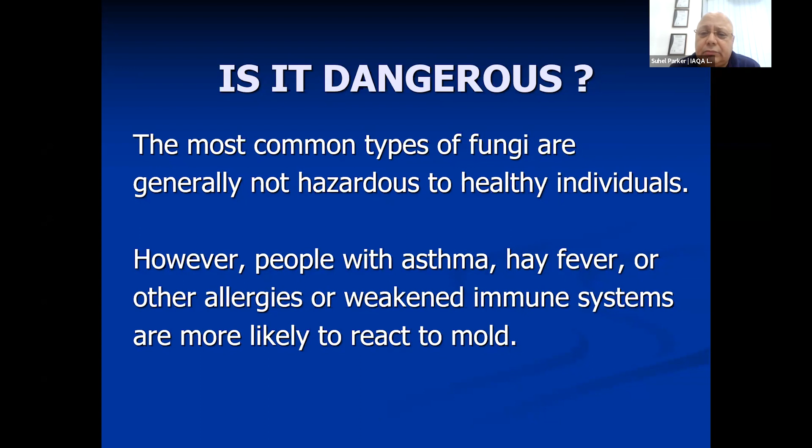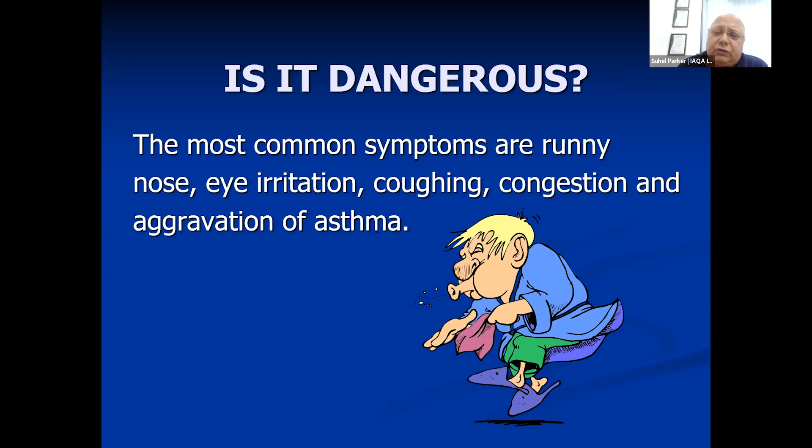Is it dangerous? Well, it could be as simple as a running nose, eye irritation, coughing, congestion. Quite often you see certain people are more susceptible than others to mold infection, but generally it's not fatal. But there are people who get infected with severe infections of the lungs, and if it's not controlled, they'll have serious consequences. It's a very small percentage generally we notice.

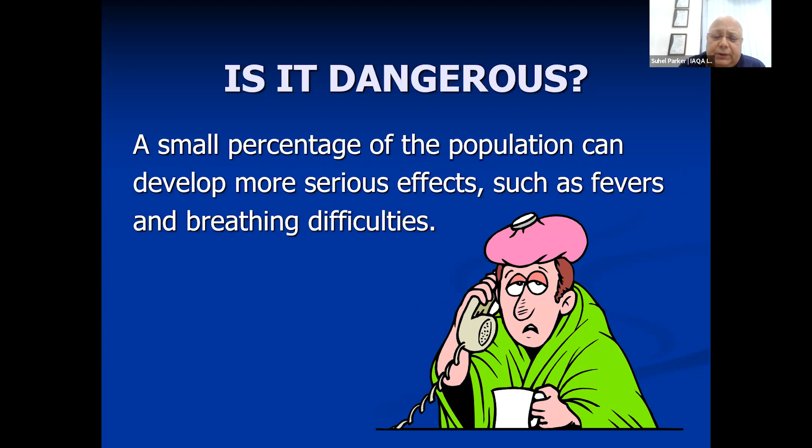In fact, I've seen in many offices, there are certain people who wear sweaters when they're sitting in there, sneezing all the time, developing a fever or running nose. The common symptoms which you see. Even though mold affects people differently and may not affect certain individuals at all, it is important that we take it seriously. You can't live every day suffering an asthma attack or running nose. Your productivity, your comfort levels will eventually affect your whole health system.

I just spoke about how mold is a very important area as far as the ecosystem is concerned. You should never try to eliminate it totally, but you need to control it and not exceed the limits. If there is no mold, life on earth would not exist. So like all other pollutants, there will be some, but it's a question of how we manage and control it, especially in indoor environments.

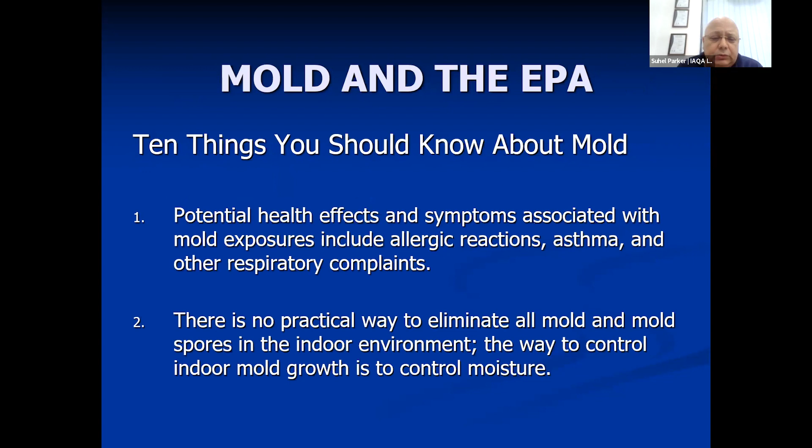I'll just skip these slides to where does it come from? Well, excessive moisture or water accumulates indoors. Mold growth occurs in most cases, especially when moisture problems remain undiscovered. I'll give you a classical example.

You go to a 5-star hotel, you have a door opening, the reception right in front, and if you see the grills right across, when the hot air meets the cold inside, there's condensation taking place, and those grills are all dark and black. That's a sign there's mold growing there, and moisture has caused it, and that moisture has come from condensation. You'll see this in quite a few properties.

Where did it come from? You need 3 basic elements to give you mold. One is moisture, second is temperature, and finally is food source. So we'll talk about these 3 elements.

You control these 3 elements, you can control mold and mold growth. Moisture: a lot of buildings, you can just walk in and you can see the problems. There's water damage on walls, leakages. HVAC systems are very common in some countries, very cold countries. They have humidifiers which cause the problem and leakages from there.

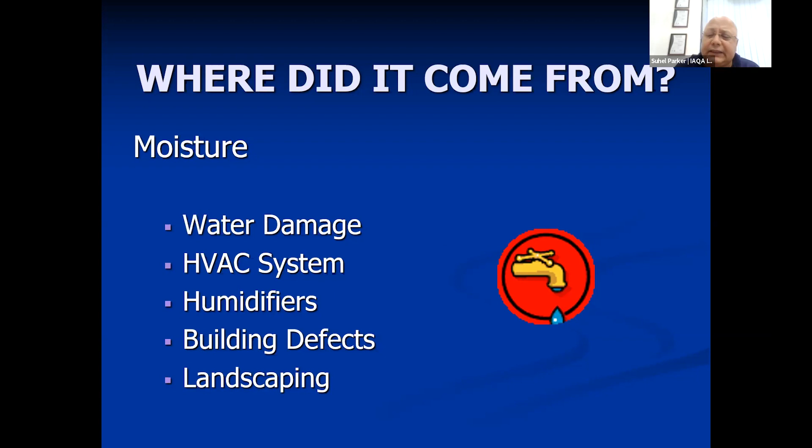Then there are building defects, plumbing lines leaking, exhaust systems not working, in-house landscaping not being managed properly. Temperature, the other element we spoke about. Quite often you see people blocking and covering vents. That will lead to condensation, imbalance, and moisture forming. Faulty mechanical equipment, blocked drip trays, non-performing coils, fans, exhaust systems. All these mechanical systems can cause imbalance in temperatures and lead to condensation.

Inadequate or lack of cooling systems. Basically, an air conditioning system is in some form a dehumidifier. Now, if it's not working efficiently and if the fresh air coming from outside is very humid, like we will have in the monsoon storm in the coming months, you will see an acceleration of growth happening. And these organisms grow in hours, not in days. So they can just spike.

Now, heavily contaminated cooling system, cooling coils. It's a wet surface, ideal temperature. Don't keep it clean, let the biofilm or other microbials grow on it, don't clean regularly, and you're going to see mold being blown right throughout the building through your HVAC system.

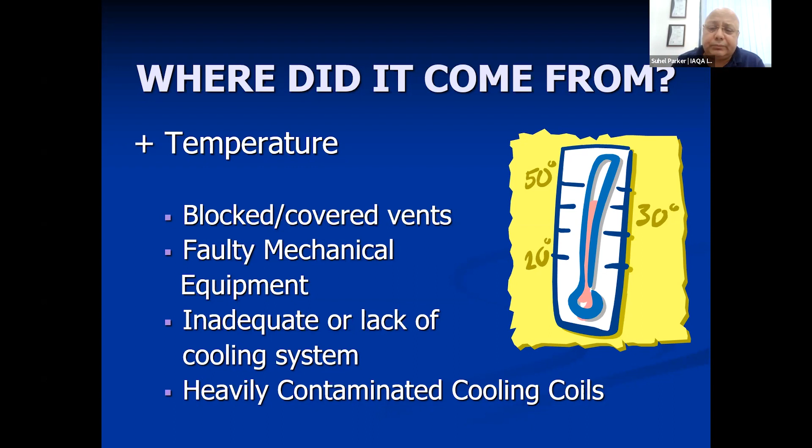What are the food sources? All your dry walls, your ceiling tiles, they absorb moisture, they retain moisture. Building materials which exchange moisture. All the dust, dirt, and debris that is accumulated in the building, in the duct systems, in the plenums, in the cavity spaces, on the floors, they all form a food source for these spores to multiply. So you add it with the right moisture, right temperature, and you have a food source, the multiplication will be a lot faster. And of course, the HVAC system just accelerates the process and passes it through if you have not maintained the other elements.

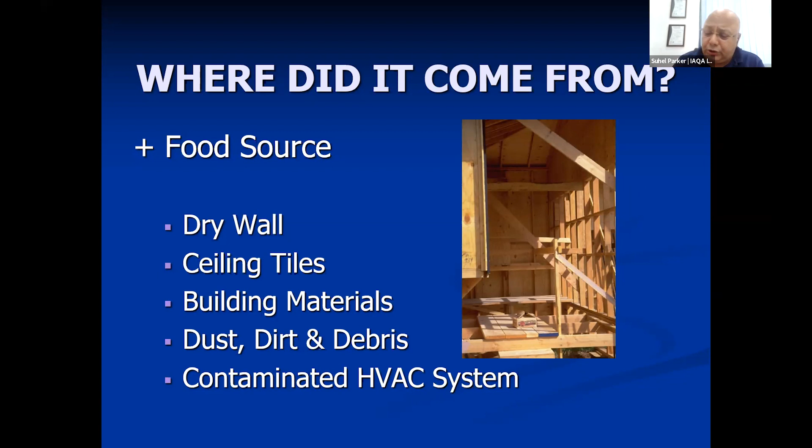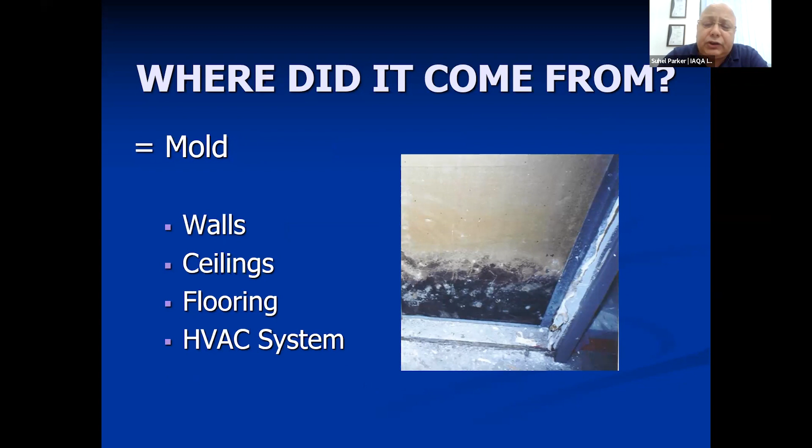Now, this is a typical picture you see in many buildings in India where it is totally ignored, and that is basically mold growing on sites because of the leakage taking place from somewhere. And we have to identify the source. They could be in walls, ceilings, flooring, and HVAC systems. It's not practical that we want to eliminate all mold. Mold spores are part of our environment. However, we need to control and need to identify the source from where to control this. And moisture control is the best strategy.

Like we have our lungs, the lungs of the building are the HVAC systems. And they carry the air right through it. They go through a process, and if it is not maintained properly, it will take it right through. Most spores that are in the air are pulled in through the return. You've got a bad environment with moisture and a lot of dirt. It's going into the system and spreading right throughout the building.

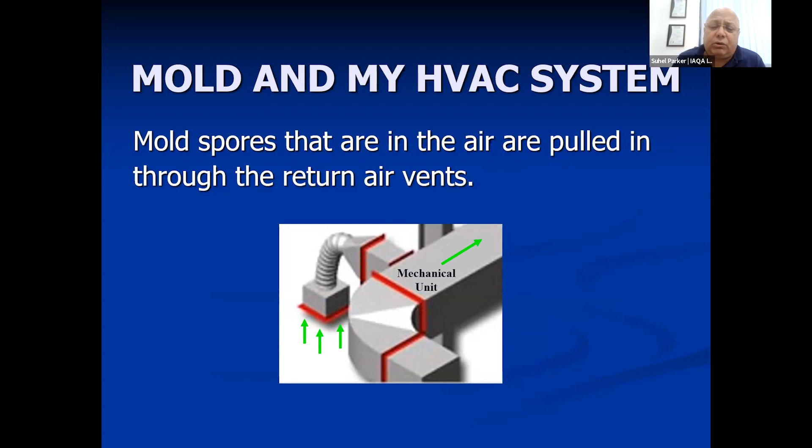Some of these spores are captured by certain filter media, and by coils. Coil is a wet surface, the drip trays. Quite often, if you see the condition of the AHU drains, they're pretty bad, and it spreads right through the building. The AHU rooms are some of the most ignored areas, but considering that it's part of the lungs of the building, it should be one of the most sterile areas.

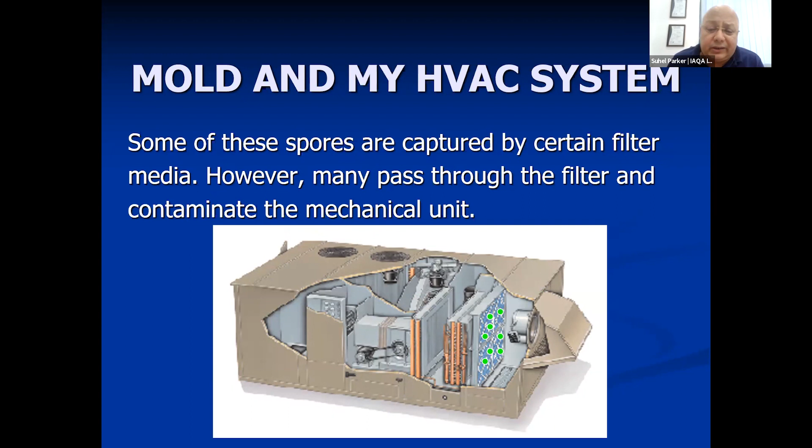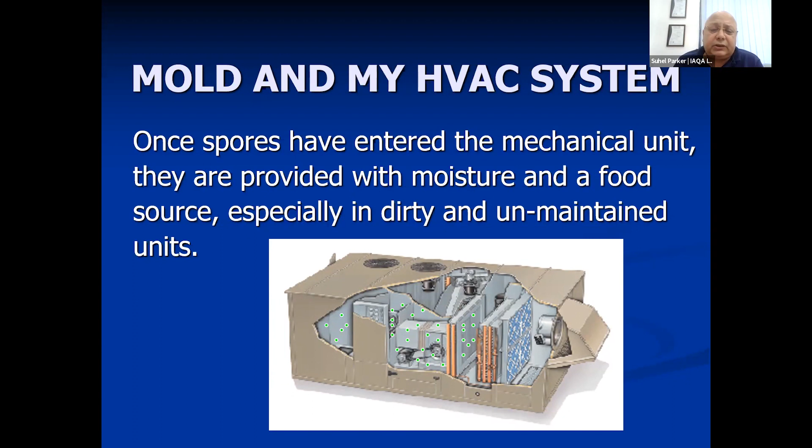Once spores have entered the mechanical system, they are provided with moisture. In AC, you have enough moisture, you have condensation taking place there, you have coils there. It's got the food source because it's getting dust and debris from all over the building coming in through the returns. And if the system is not maintained properly, not cleaned properly, it's even worse. So mechanical is the breeding ground for microbial contamination when we don't look after it properly.

And cooling coils are so ignored at most times, and even the AHU rooms, the conditions are pathetic. And as we said earlier, the system is the lungs of our building, and it is spread right through.

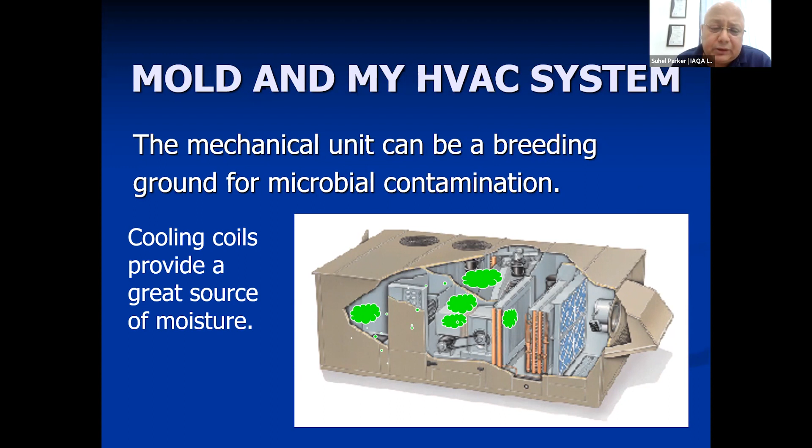They then send right downstream and deposit throughout the building. Warning signs. See, we do IAQ audits. We do take an air pump and do air samples. We do count the number of colony forming units. But if you are managing a building right, if you just walk through the building, or when I take a walk, you will see the color of the air vents.

You know where the problem is. You see the condensation on the air vents. You know it. You can smell it. I can smell it, and at least 40% of the hotels and rooms I've stayed in, 5-star hotels, I can smell the odor of mold. And the chief engineer has just put the temperature at 19 so that I can't smell it, and locked it. The minute I go above 24, I can smell the mold.

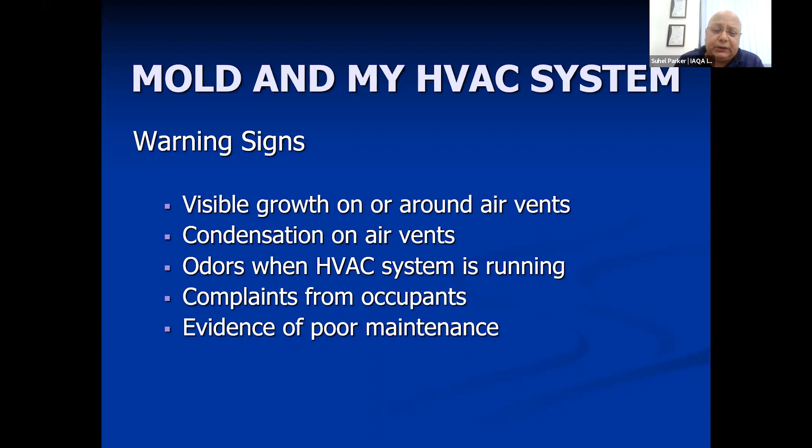Those three things we talked about: moisture, dirt, and temperature. We can control the moisture, we can control dirt. Find out the source. Is this a leaking pipe? Is this a badly maintained HVAC system? Is it mixing of cold and hot air at certain spot where there's condensation happening? Source removal is the first step you need to take.

And then communicate these actions, what you have found, where they were, and what you have done about it. So you can keep on eliminating each of those areas, document it. So you know if it's still happening, you have to look somewhere else. The problem can be solved quickly if you attend to it. If you let it fester, removing mold, doing a mold remediation, it's a very painful, long process. Catch it at the beginning, it will not spread. But once spread, it takes a lot of time to handle.

The safety and health of your employees is so important. Just imagine you have a high mold content and people are uncomfortable in the office. They've got running noses, they've got watering eyes, some are sneezing. And if this thing keeps continuing, what is your productivity going to be? Your problem can become a disaster. Avoid that. So your maintenance, awareness of your entire maintenance staff to look out for those telltale signs to prevent it from happening.

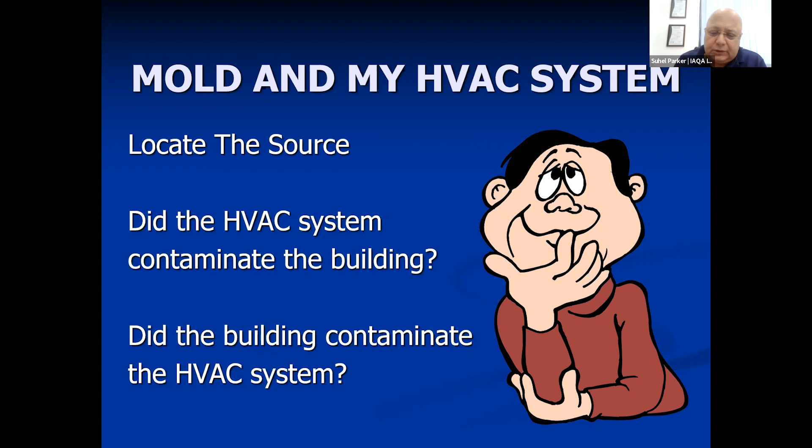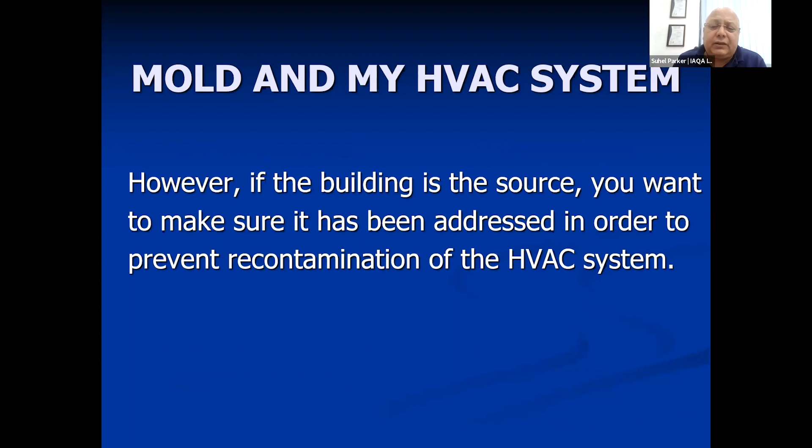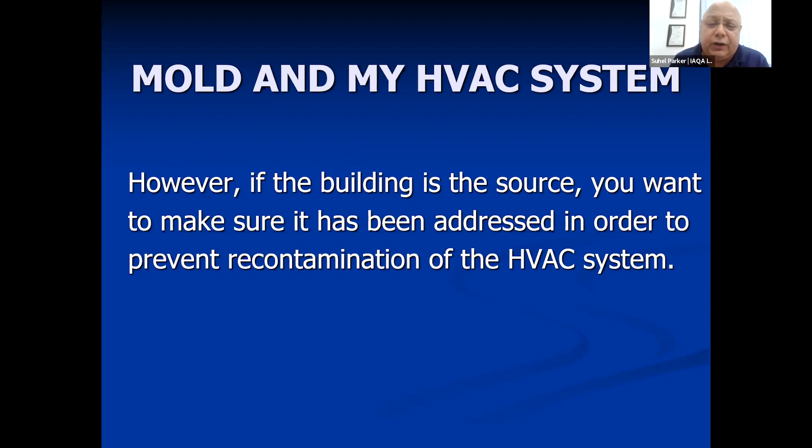Regardless of the source, you need to properly clean and decontaminate. However, if the building is the source, you have to find it, address it, fix it, so that it does not recontaminate again. Because you can keep cleaning. If you've not identified the source, it will come again and again. And most of these things are pretty simple, but we ignore it. HVAC remediation should be performed by a professional who understands.

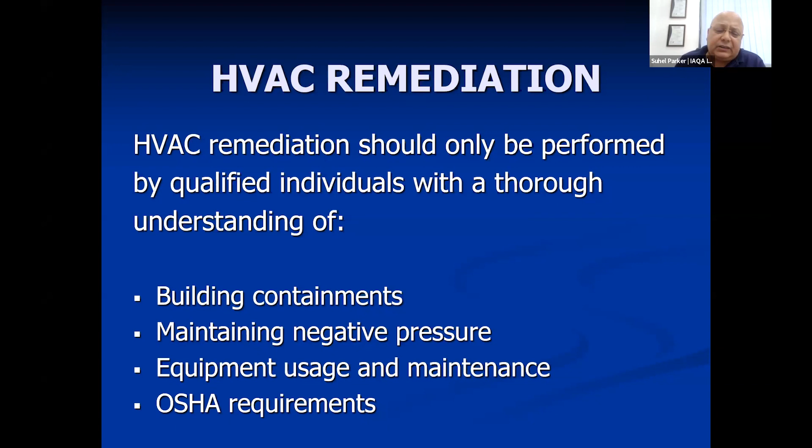So when you find that there's a mold issue in your building and it has infected large areas over a long period of time, then you will need to get a professional to fix it. Because he'll have to create a containment; not cleaning it properly might promote it spreading faster and across if you get an inexperienced guy to handle it. And there are standards, there are requirements for safety which can be addressed.

Benefits: increased employee morale, productivity, as I spoke about. Generally, air conditioning is for comfort, and we don't have many claims here in this country, but it will be an issue in the future.

Did I finish it in my timeline?